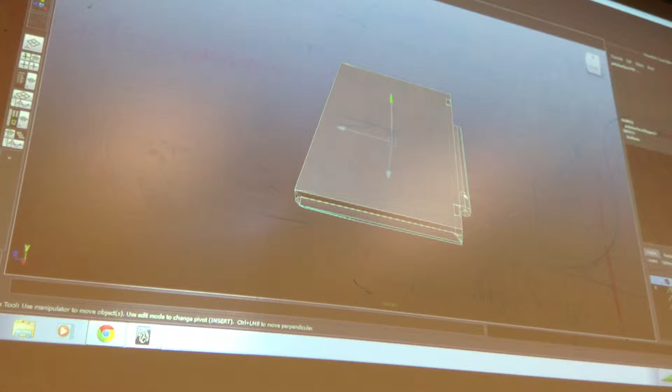But once you do triangulate, it makes altering that model much more difficult because you're not in quads or in a cleaner form of geometry that allows you to change and update quickly. Once it triangulates, it's very hard to go recut things or remanipulate that geo in any way. So before I triangulate, typically what I do is I dupe my model and move an extra spare to the side.

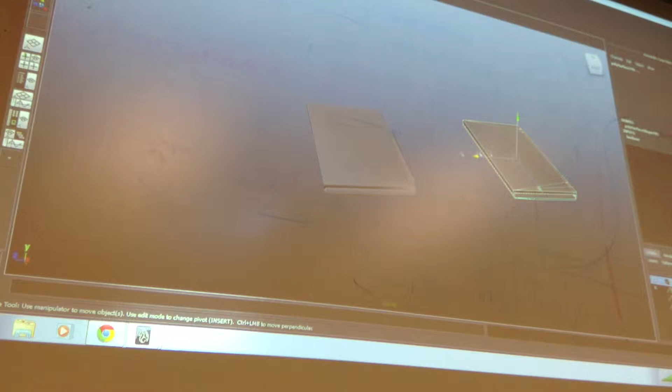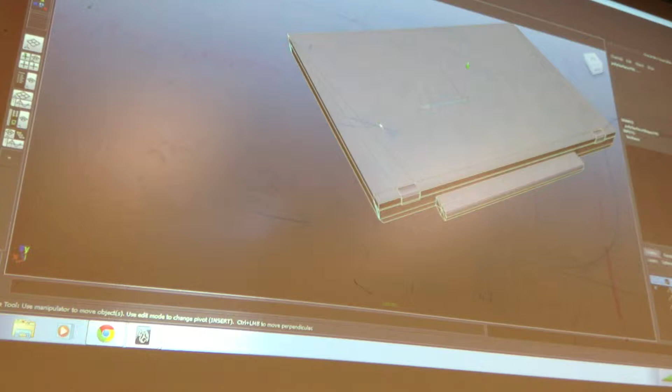So if I ever want to go back to it, I can, without all the extra triangulation. Maya does have an option to undo triangulation called quadrangulate, right here. But it doesn't really work all that well, especially since I've put in triangles already. If this was modeled in all edge loops in proper quads, it would undo the triangulation the right way. But on this type, where I've purposely put triangles in after triangulating and tried to untriangulate, it would totally screw up your model.

So I just usually save a copy before this. I'm going to select my model, shift right click, and go ahead and triangulate that.

When you triangulate, if you have toggled on your hard and soft edge display, you should notice all the triangulation is always soft.

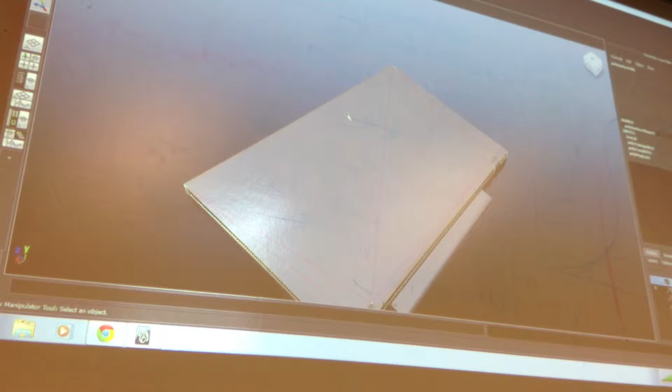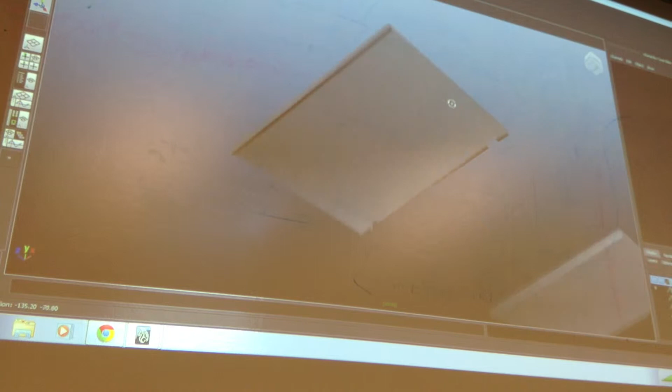Let's go ahead and take a look at some of these things. After that triangulation, you can see there's a little bit of a gradient happening here, and also on the side there's some gradient I didn't notice before. Once I triangulated, it's really showing up, which probably means I've classified some edges improperly or just missed them. So if you see this gradient, see that right there, pulling, see that?

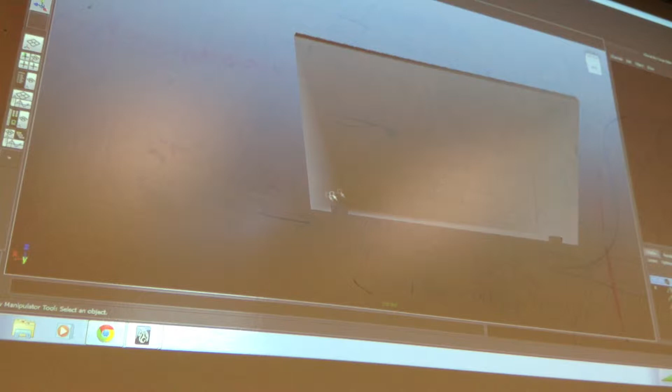I'm willing to bet there's an edge here that's soft that shouldn't be. So if I just select this one edge and harden it the way it should be, it looks a lot nicer. And right here it's really bad too. I think this is what John might have been pointing out, that I missed quite a few actually.

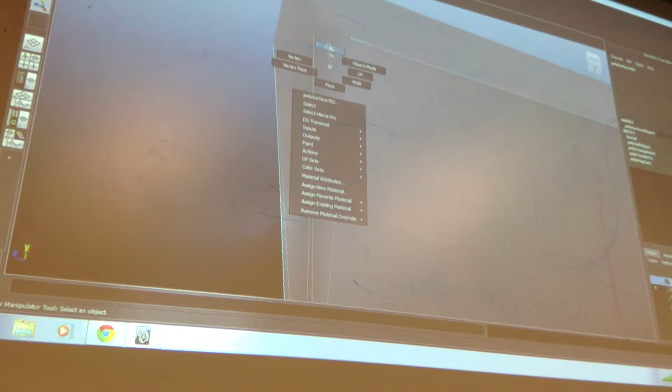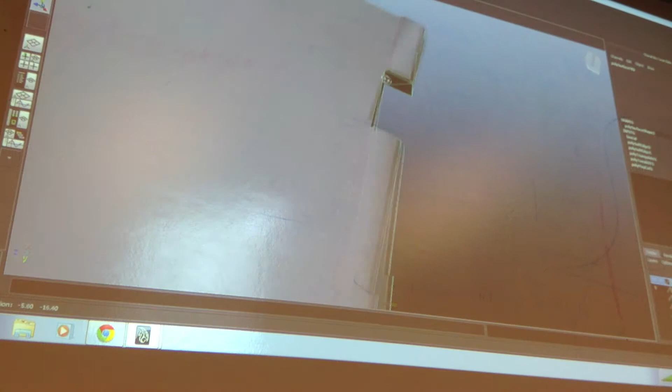So I'm going to go ahead and harden those, and just double check around this real quick. I think the rest of that looks pretty solid. You can see it's fixed the gradient issues, so that looks fine.

So that's just the triangulation. I also double checked my edges.

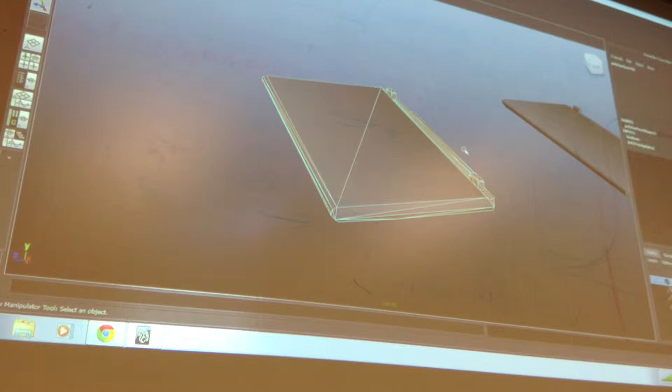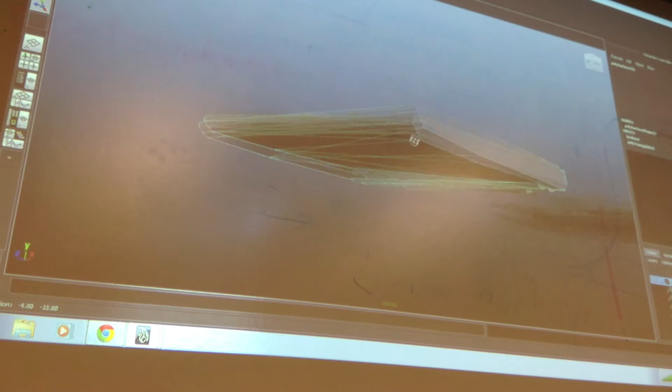I'm now going to do the same thing on the bottom. I just want to go ahead and check this. I can't see what edges are hard and soft on the bottom, so I'm going to shift right click, soft and hard, and toggle soft and hard edge display on so I can see the dotted lines. I'm just going to roll around this real quick and check. I think this edge can be hard too. Okay, I think everything looks pretty good there.

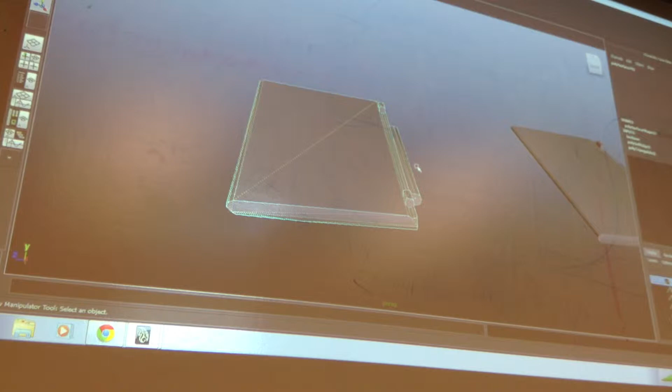I see that you took out the circular part inside the hinge, should we keep that in? Yeah, you should have a cube or something there so it's not floating, that little circular part. So yeah, you should have a little circular part there, and also on your lid, you should have a low poly representation of the hook as well.

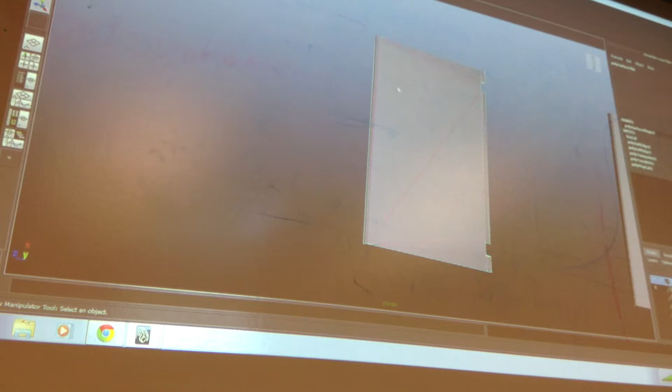Okay, now when we get ready, I'm just going to go ahead and put this one on another layer, my extra.

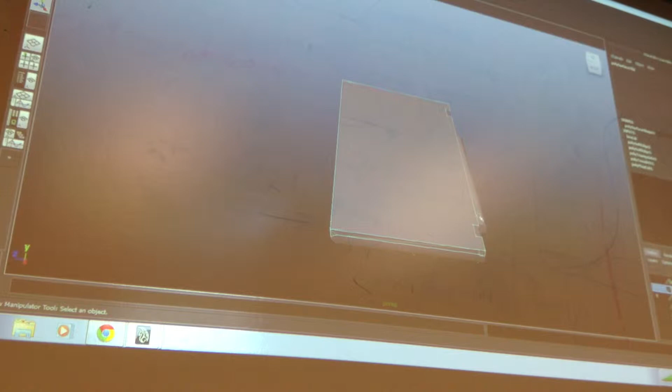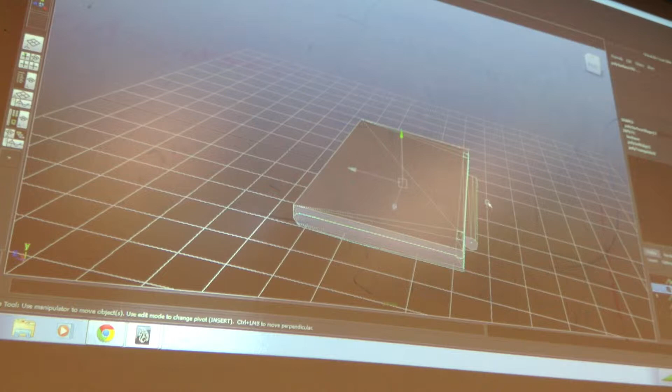Now, with this, I need this to be set up a certain way. You can bake out all your maps all at once, but to do that, anything that's really close together, you have to explode out. You have to give it space. So you need to select this and move it out of the way to make sure there's room for it to project in between these two objects.

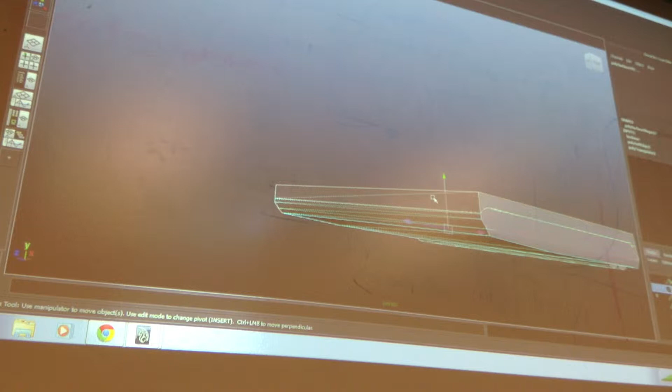If I baked out my object like this, what would you expect the inside to look like? Really dark, right? You're probably also going to see the keyboard show up on the lid, and the information from the lid show up on the keyboard. They would burn into each other, essentially.

Typically speaking, I don't explode my model in a way to bake out multiple parts at a time. The way I do it is I bake them out in parts. So I'll bake out the lid and the base separately, because in a way it gives me more flexibility. If for some reason I have too much bleed off on part of my edges, I can always go into Photoshop and trim that down a little before it creeps into the other UV space.

And then I'll just combine them in Photoshop. If, say for instance, I get a really nice bake on the top but not the bottom, I just need to redo the bottom, and then I can combine them together. So it gives me more flexibility, and just more options.

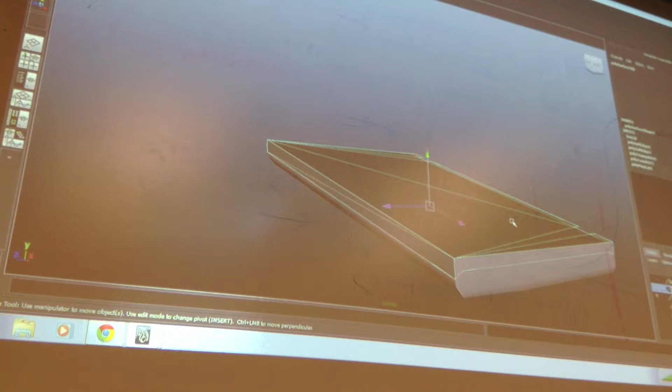So with that said, what I want to do is select both of these and delete the history. And I'm going to go ahead and hide these for a moment. And I need to prepare the base.

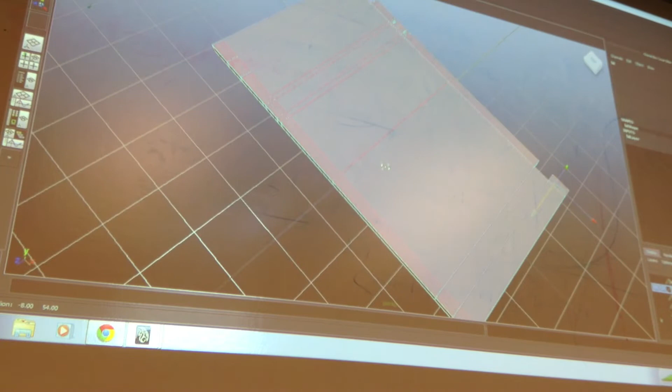Now, keep in mind that the low poly lid, look where its pivot is. It's at the origin, right? The high poly lid is on the side so I can bend it. That's probably going to be a problem.

The high poly and your low poly should basically occupy the exact same space. You also need to make sure all these numbers are zeroed out, at one. So if you need to freeze it, freeze the model, and then delete the history. You want to make sure these are all zeroed, and their pivots should match the same space. So if you have one object located here, and you're trying to bake it out and the other object's over here, it's not going to match up.

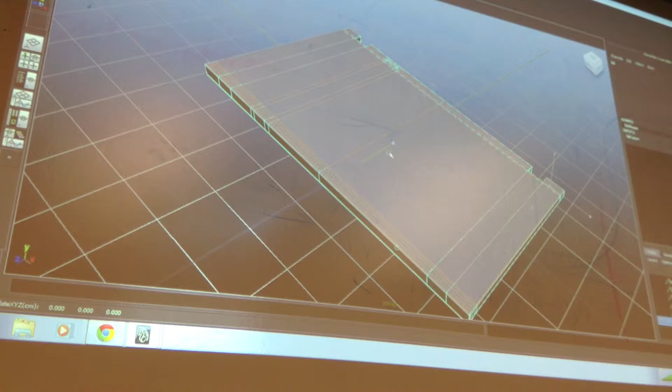It's going to lead to some huge projection problems. They basically need to be on top of themselves, okay? Which these are, but the pivot's not, so it's going to relocate when I export. So I'm going to move this pivot to the center, like so.

So wait, how do you change it on the high layer, or the high poly? Because we put it in render. How do you recenter the pivot on that one? That did it. No, I mean I can't select my high layer. My high poly, do you have it on render? Yeah. So how do you change the render option so you can select stuff? We should just have it all the way off. Yeah, if you need to select it, yeah.

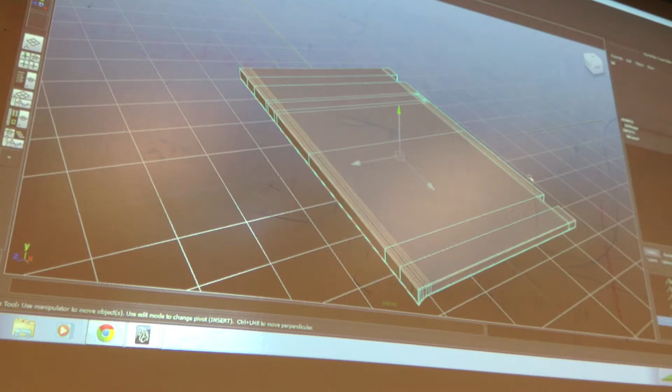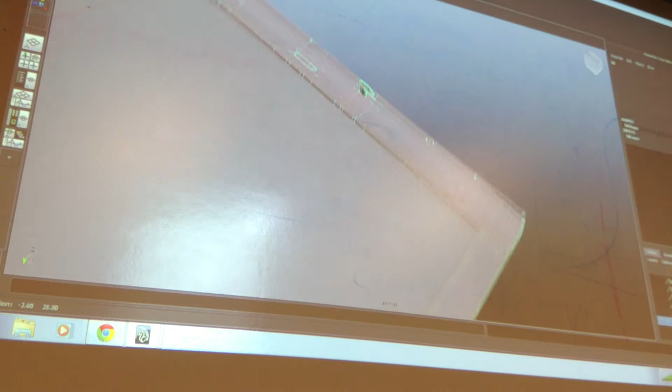So I have this lid here, ready to roll, and it's in place. And up until this point, all we've been doing on these models to see what they look like when they smooth is just pushing the 3 key, right? That actually doesn't add any geo. All it does is give you a nice little preview of what it's going to look like when it does smooth. But now we actually need to add some geo for when we export it.

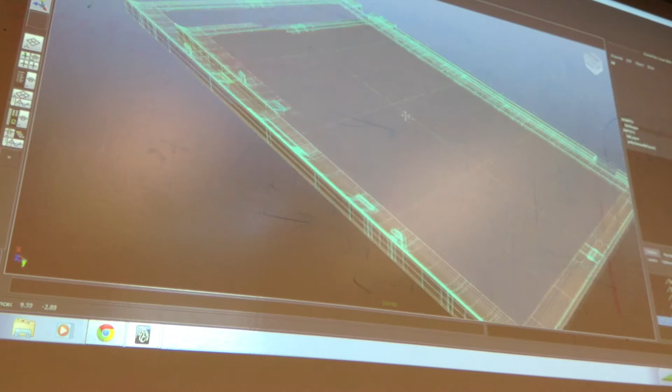So I'm going to have this selected, go shift right click, and say I want to smooth you. So smooth. And that actually added geo, you can see the geo has been densified. You can either smooth it once, or if you want, hit G and smooth it one more time. So we're at 200,000 polys.

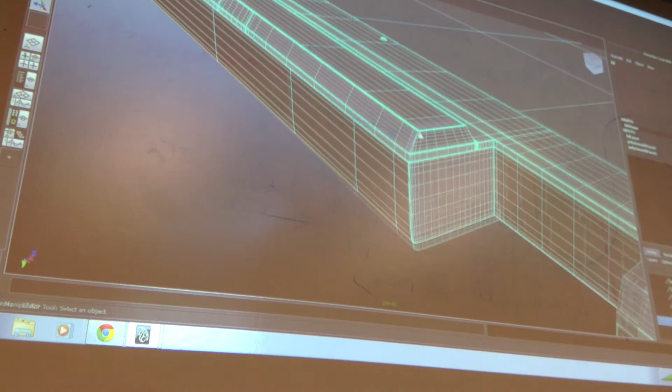And you can see that actually added more geo. I want to see if I like that. So we're selecting it, not to demonstrate something, but it probably should be done this way. Yes, I forget what they're called, but when we were messing with how faces were facing, I don't remember how to remove these.

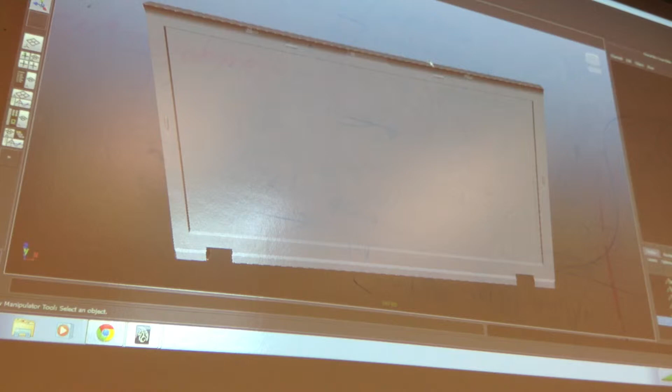Just toggle off your poly display. How do I? Okay, there we go. Find it? I think so. There. Okay, there we go.

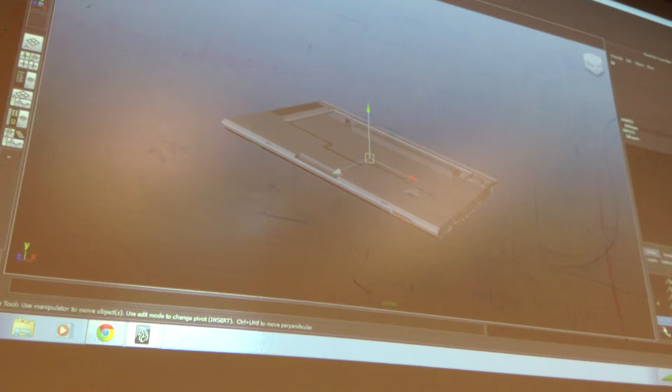So I just smoothed this once. This is 50,000 polys. This guy's ready to go. I'm going to delete its history, and now I'm going to hide it. I'm going to bring in the base, and I'm going to bring in... actually, let me bring in the speaker.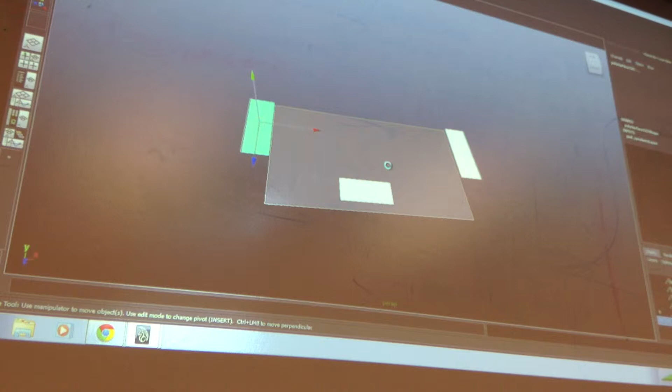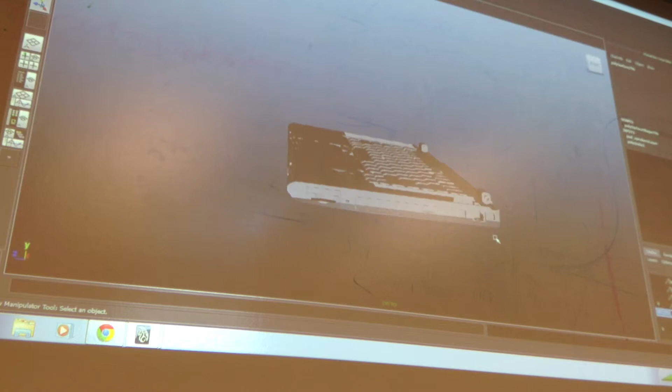I'm going to combine the speakers real quick. These have been combined. You'll notice after you combine something that it removes it from the layer, so I'm going to re-add these to that layer real quick. Now I have the base and the keyboard. I'm going to select all these. Okay, and I'm going to combine these together.

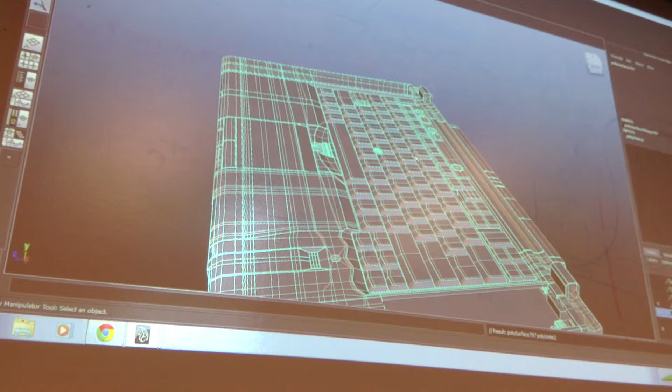The reason why I'm combining these separately is I want to run 2 smooths on my base and only 1 smooth on my mouse pad and speakers. I don't want this thing to blow up to like 10 million polys, so I'm going to smooth them separately. It looks like this key is still being obnoxious, so I'll just select it and move it back into place real quick. Just eyeball it. I'm okay with that.

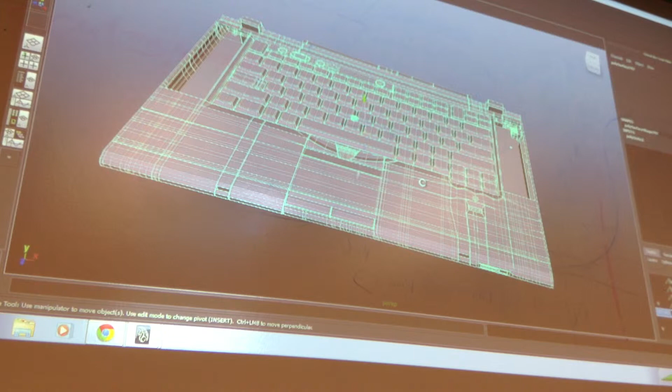Okay. So here's the bottom part of the laptop, and I'm going to smooth this. There we go, there's 1 smooth. This will take a little bit, it's a lot more geo. Okay. That doesn't look too bad.

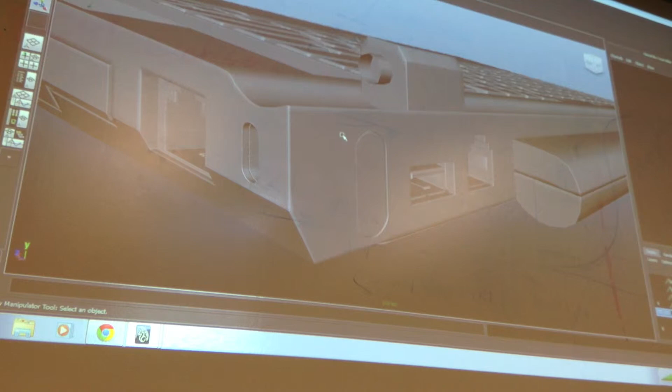You'll notice from 1 smooth, if you look at some of these side parts where it was round, that's still not completely round at some of these parts. So if I'm feeling brave, I can smooth that one more time and pump it up to about 4 or 5 million. But don't you just smooth that round part separately? That would be a better choice, right? Those are things to take into consideration.

At home I use a workstation, so I'm usually not too worried about poly counts. I can easily push 30 million without a problem. When I get above 30, it kind of has a fit, but I can usually go between 20 and 30, no problem. So I personally don't really worry about it too much.

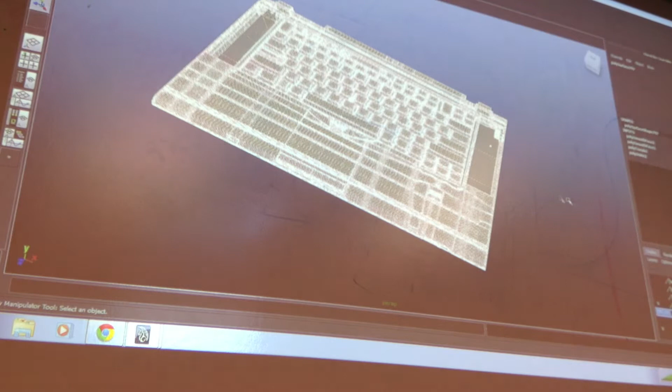This thing's handling it just fine. I'm at almost 5 million, and I'm not experiencing any lag. I'm still rocking 60 to 100 frames. Boom. Look at that. Okay.

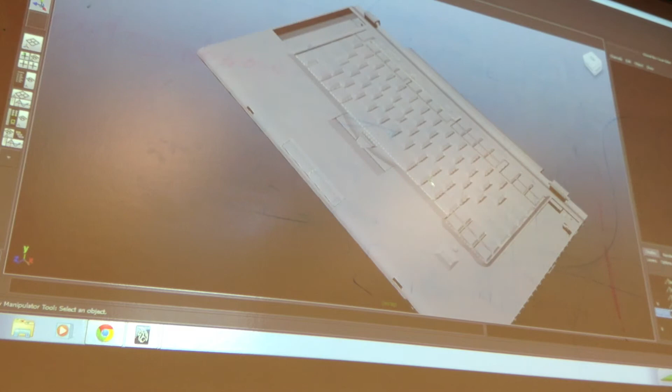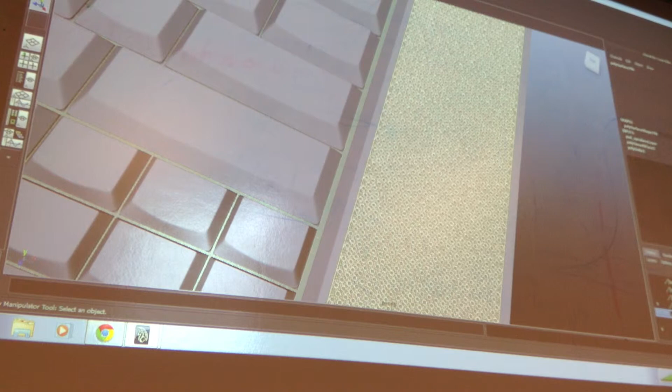Now I'm going to bring in the speakers, and because these are a lot of polys, I'm only going to smooth these once. This will bump it up to about 1 million, I'm guessing, yep. I think that's still going to look pretty good. You can see these are not perfectly round; I would actually have to smooth these at least one more time. But for what we're doing, demo-wise, this will be good enough.

I'm now going to select both of these and combine them. And I think we'll be alright. P.S. When you're doing these things, you should have your power supply plugged in or you won't get optimal performance. Maya sucks a lot of energy, RAM, and processing. You should not have an excessive amount of other applications open, and you should be plugged in.

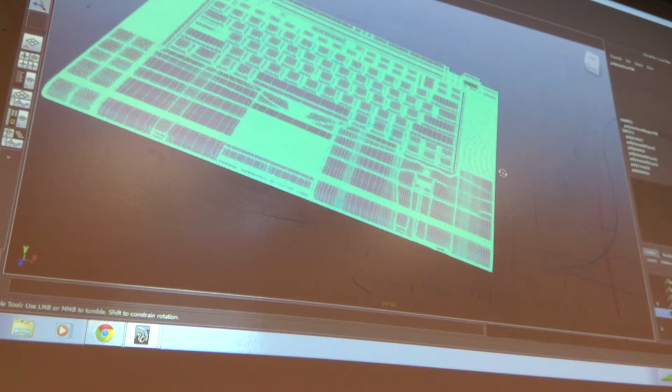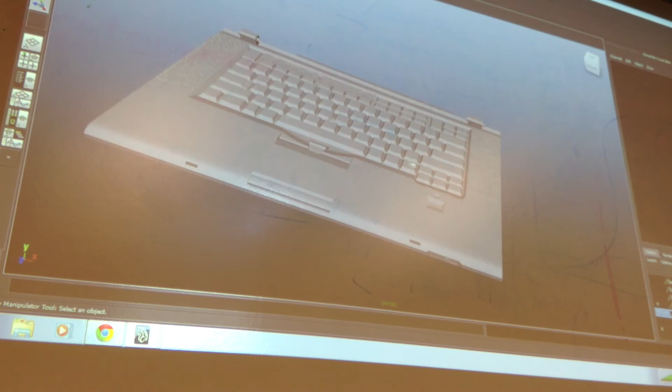So, I haven't even smoothed anything yet, and it's terribly slow. Trying to just zoom, I can't even do anything really. Sometimes it will be slow. Check your task manager, see how much RAM you're using right now, and see what else you have open. I'm using the same machines you guys are, and I'm at almost 6 million polys. You can see it's very responsive. It's not bad at all. So it depends; sometimes maybe it will take a few more.

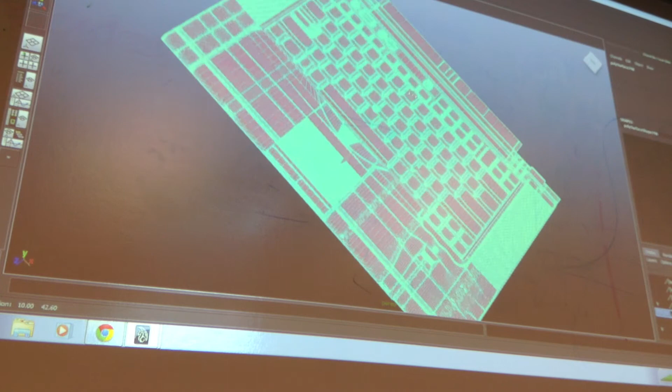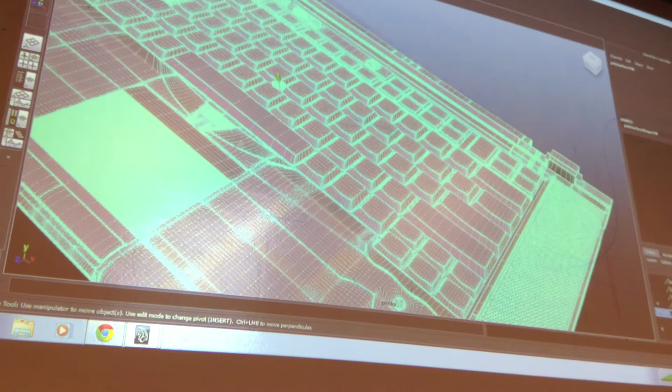You said to smooth the bottom twice and then the speakers once? If you want to round some of the circle areas. If your machine's having issues handling it, maybe just smooth the bottom once. I like the round stuff to look round, so I smooth it twice. At home, I'd probably smooth this 3 times. It just depends what you want to do.

Again, probably the stuff that you guys would be modeling on the building, the high poly stuff, is probably not going to be 5-6 million polys on your high poly models. So you're probably not going to run into any of these problems.

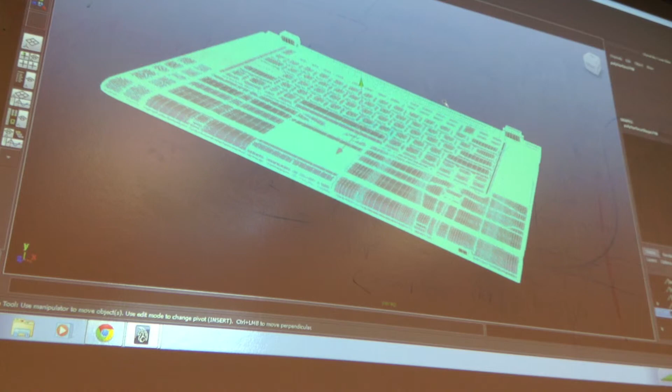Yeah, Carl? Just a question. On the speakers, since the holes in the speakers are so small, does it really matter whether they're actually completely round, if no one really ever looks at something like that close? Yeah, exactly. It probably doesn't matter because it depends how close the player's going to get in conjunction to what size texture map you have, right? Because if this texture map is only 512, well, each one of these is essentially a square pixel anyways, right?

Yeah. So that's something to take into consideration when you're building your high poly stuff: how much detail are you actually going to be able to transfer over into your texture map based on the size of your map? Are you wasting time putting all this detail in that's not even going to project because your texture map is not large enough? Those are things to consider.

I don't think we'll notice this detail. We're going to bake a 1K map. Okay? But if we baked out a 2K map, I guarantee this would show. You would notice. 2K has a ton of information. Or for film, we can do an 8K map if you really want to be here all day.

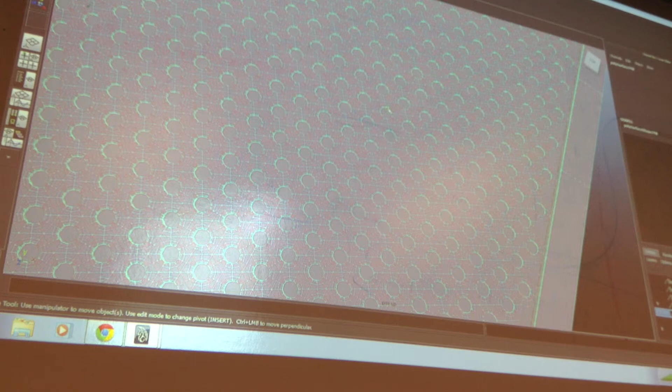Yeah. So for our high poly model, I remember we're using the model that's uncompleted, so the bottom has colors and stuff. Should we switch over and grab the completed model? I probably would. You know, the FBX Bake 05 is the completed model. It's only 10 megs. Should be fine. Okay.

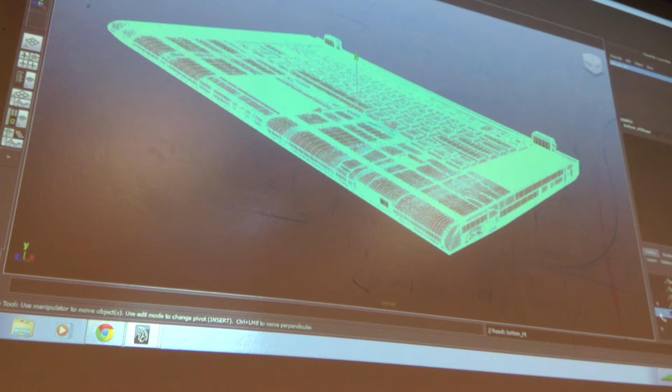So I have this thing ready to go. What I'm going to do now is I'm actually going to name my stuff. So I'm going to name this bottom high. Okay. I'm going to add that to this layer. And I'm going to call this lid high. Okay. So it looks like that's good to go. And let me hide that.

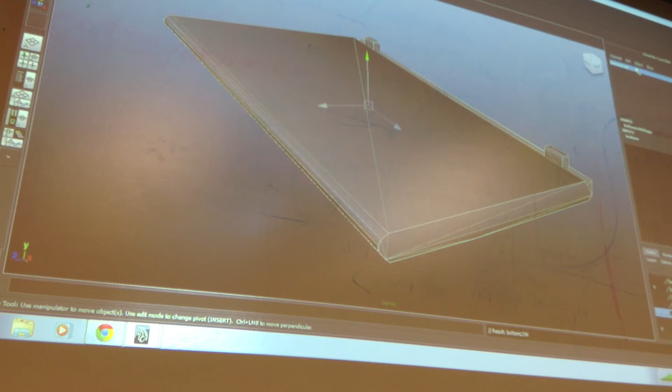This here is bottom low. Okay. And this here is lid low. Okay? So with only one selected, because I want to export them separately, I'm going to start with my low stuff, and I'm going to go File, Export Selection, right here. And now I'm going to find my folder. And I'm just going to stick these right here.

This is just for demo purposes. Ideally, you would want to have your project file set up, you'd have your project set. By default, exported objects, regardless of what they are, Maya sticks them into the scene folder. Personally, I don't like that. My scenes are for my scenes. So typically what I do is I'll create a local transfer folder or an export folder. I'll just add my own folder.

So I'd come to desktop and say, okay, right click, new folder, and I'd just call this exports. And this is where I would put all my in-between models. Usually assets is where I will stick my final assets, and I'd have a folder in there for each asset with the object or the mesh, and then the correlating final textures that go with that. So I try to keep it very clean that way.

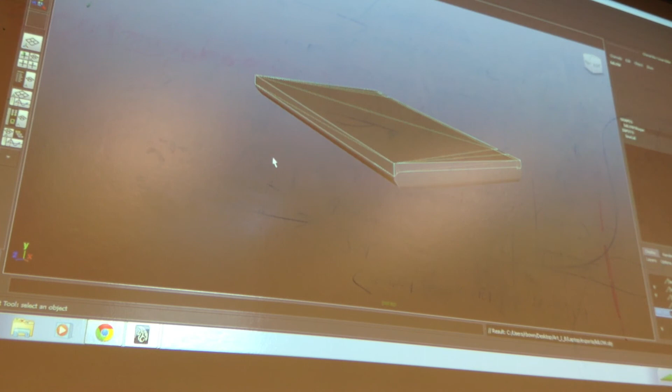So if you want to, create it like this, and I'm just going to call this lid low, and I'm going to export that as OBJ. If for some reason when you go to export you do not have the option for an OBJ, you have to enable it. The way you do that is Window, Settings/Preferences, Plugin Manager. And then you just scrub down until you get to OBJ Exporter, load and auto-load that. A lot of times it doesn't auto-load. Check that and then you'll have the option to export an OBJ.

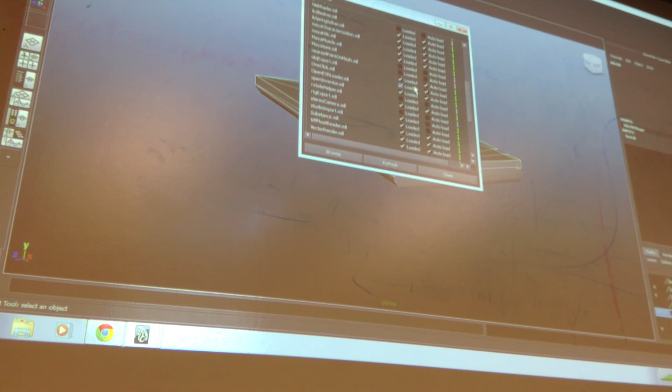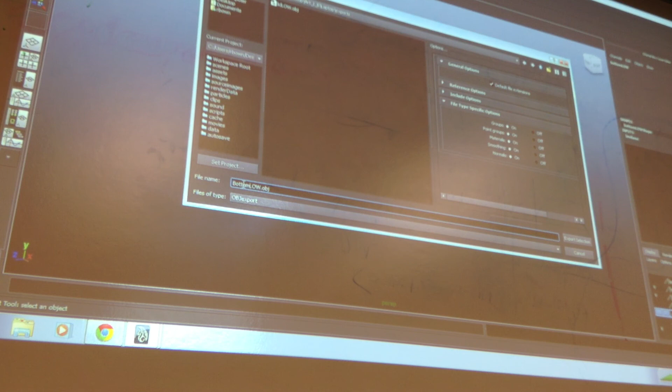Mine's good to go, so I'm just going to close that. I'm now going to export this guy, and this is the bottom. My last action was bringing up the export selected, so if you just go ahead and hit G, if that was your last action, it'll pop that window back up for you. And notice it will bring it up to the spot where I put the last thing. So I'm just going to click on this and type in bottom low, and I'm going to export that. Okay.